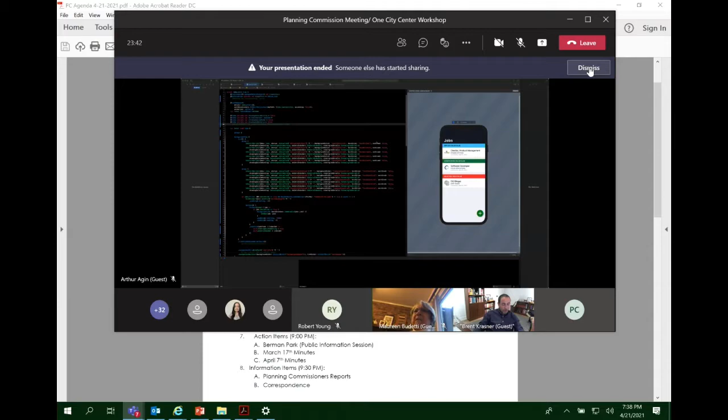So with that, we've adopted the agenda as it's printed, which means before I jump ahead, we have no speaker series. Are there any petitions that we've received, Ms. Bazemore, for items not on the agenda?

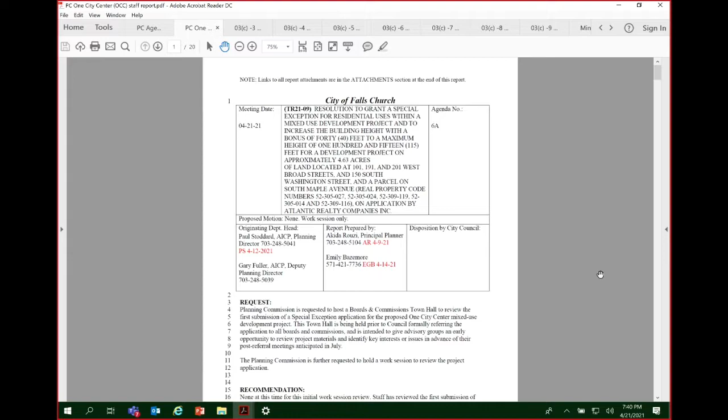All right, thank you, Chair Krasner. If I could just touch on some of those points that Brent already mentioned, the process we're going through here is a pilot effort. We happen to have 2 applications in right now for special exceptions, so we're piloting this new process with both applications. Of course, at the last Planning Commission meeting, there was a workshop on the Founders Row 2 application. And Ms. Bazemore, if you could jump back to the agenda real quick.

We got some feedback from the council this Monday about some concerns about making sure we were messaging appropriately where this application was in the process. So we added this disclaimer to the agenda earlier today, just to highlight the fact that this is, as the chair said, a preliminary workshop. This project hasn't received a formal action from council, and so the idea is to solicit preliminary feedback, early feedback from the boards and commissions. I think the benefit is to get the boards and commissions involved sooner, so that their feedback can be heard and incorporated when the project is in its early phases. And hopefully that's a benefit for the applicant as well, to hear from a wider band of the community what would be interesting to the various participants that take a look at this.

This is a special exception application, and I'm actually going to turn it over for the details of the application and the project summary and the staff analysis to date to the lead case planner on this, Ms. Akida Rouzi. Akida?

Good evening. Before I turn it over to the applicant's team for their presentation, I'd like to provide a brief summary of the staff report. The application before you is for a new mixed-use development proposal at the intersection of West Broad Street and South Maple Avenue. The overall proposed development site entails 5 parcels, including 150 South Washington Street, 101, 191, and 201 West Broad Street, and a small vacant parcel at the corner of South Maple Avenue and West Broad Street.

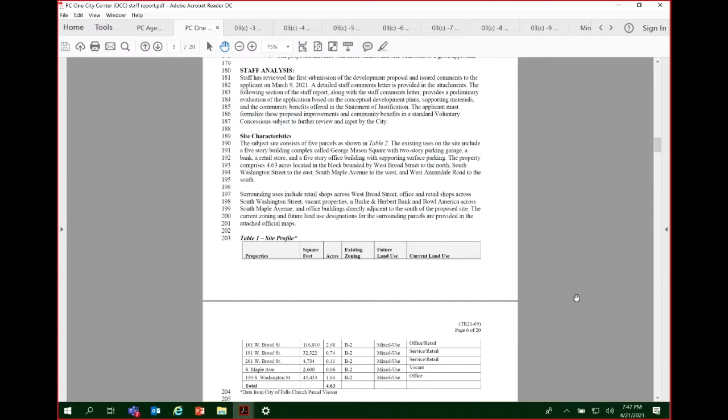And the proposed community benefits—the applicant plans to provide their first draft, as mentioned, as part of their second submission in mid-May. Right now, most of the proposed community benefits are discussed in their narrative statement and their SC view book, and staff's evaluation of those, based on the SC code, is provided on page 8 of the staff report. For tonight, I'll just provide some key highlights from that analysis.

For comprehensive plan consistency, this area is already planned mixed-use on the comp plan land use map, so the proposed development is consistent with that vision. The comp plan also calls for a balanced mix of uses that reinforces and maximizes pedestrian connectivity and results in a significant market-driven commercial activity center, supported by residential uses necessary to ensure commercial success here.

For small area plan consistency, the downtown small area plan recognizes the project site as an area for dense redevelopment potential. The site is within the core commercial area, which is envisioned for greater concentrations of commercial activity that supports density and taller building heights.

Like the comp plan, the small area plan also talks about investment in pedestrian infrastructure, walkability, and active and vibrant streets. With the ground floor commercial uses proposed in the project and the pedestrian improvements around the site, the project begins to demonstrate consistency with some of these goals for the area. Of course, the investment in existing commercial spaces like the George Mason Square building and the 150 South Washington building is another positive aspect of the project.

So I think we all know where the site is located. This is something that we've all walked by. We've dined at 4Ps, we've walked strollers by, we've jogged by. It's really 5 separate parcels of record, as Ms. Rouzi said, comprising about 4.62 acres. On the site today, there's about 130,000 square feet of existing commercial uses.

This includes the existing parking garage that is attached to George Mason Square, the 3 office building complex, shown in number 4. It also includes 150 South Washington Street, the office building just on the south side, shown in parcel number 5. What's interesting about that is it's split, bisected by Annandale Road, which was pushed through when the city extended Annandale back in the late 1960s.

So it separated that parcel out. And in the southeastern quadrant of that intersection, directly opposite the bowling alley, is a triangular parking lot. Sometimes it's used for overflow parking, but it is paved from stem to stern, and it's just sort of sitting there. Up at the corner of Maple Avenue and West Broad Street, directly across from the CVS parking lot,

there's the very small parcel number 1, what we call the corner parcel, and number 2, which is the Matt's Tailoring parcel. Those are the 2 properties that were conveyed to the city or from the city to Atlantic Realty, and they're the ones that have the residential deed restriction on them. It basically says that thou shalt not do any residential on those 2 parcels without the blessing of the city in writing.

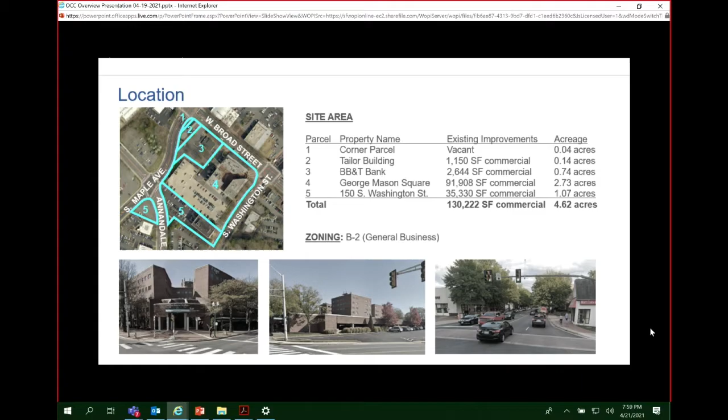And then last but not least is the BB&T, the former BB&T building and its associated parking lot as well. All of these properties are zoned to the B2 General Business District. And again, the total amount of commercial square footage is about 130,222 square feet. So if we can go to the next slide, please.

Ms. Rouzi touched on the comprehensive planning recommendations for this site. We really view this as a positive step in the implementation of the city's comprehensive planning policies, which, at least in terms of this site, go back more than 15 years.

The future land use map, shown on the left, designates this property for mixed use, which encourages innovative residential, retail, and commercial office uses. The 2005 comprehensive plan incorporates the city center concept plan, along with a new mid-block pedestrian crossing along West Broad Street and a traffic circle at the intersection of South Maple Avenue and Annandale Road, catty-corner to the redeveloped bowling alley. That concept plan, shown in the upper right-hand corner, was incorporated into the 2005 comprehensive plan.

Shown in the lower right-hand corner is an excerpt from the 2014 Downtown Small Area Plan. The Downtown Small Area Plan includes this property within what is known as the core commercial area of Downtown Falls Church, and it is intended to evolve into the densest, most walkable and bicycle-friendly district in the city for downtown. So if we can go to the next slide.

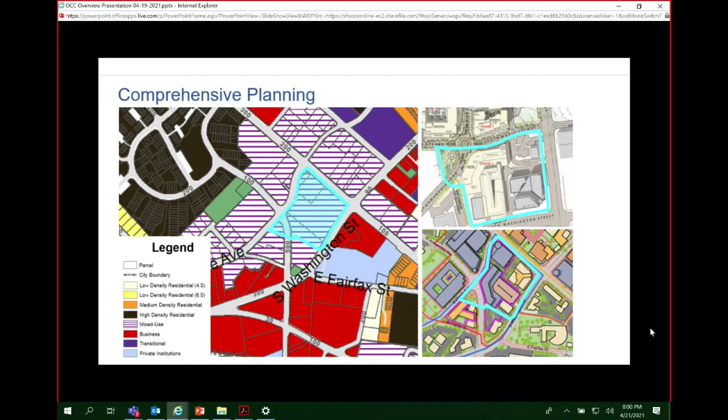In addition to these specific city council requests, there would be at least two planning commission requests. One would be a site plan for the new construction, the new mixed-use building and the new things that we're proposing on the site. And then one would be a site plan amendment to show the changes that we're proposing to the existing George Mason Square office complex. So we will hopefully be back before you for both of those at a later time before the commission, after or concurrent with this process.

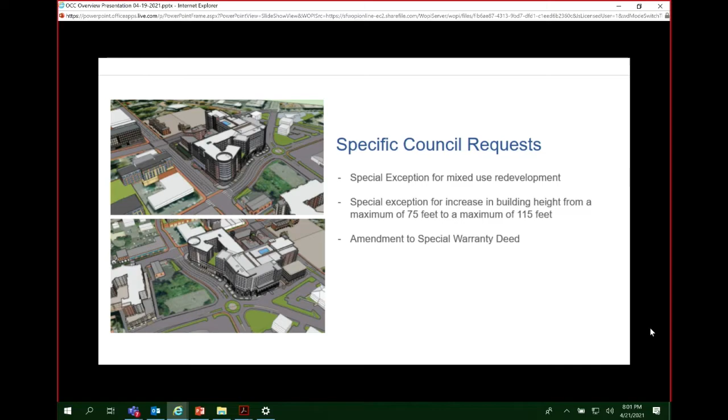If we can go to the next slide, please. We want to take a step back and just talk about how we approached the design that we'll be showing you this evening.

This is a site that is extremely prominent in the city. So we have tried to view the site holistically and as a key component to Downtown Falls Church. When you come from I-66 and you're heading south towards the Dunkin' Donuts and you're sitting at the light, that site is there. It's visible as soon as you pass the State Theater, right? And you look off to the right.

This is an area that has long been planned to evolve into a vibrant commercial hub, residential hub, mixed use hub. It's a site that has waited for a long time for the right mix of land uses to help realize the downtown small area plan. And we've also been thinking about repositioning George Mason Square to make that asset work better. So that's the first design driver: to view this site holistically.

The second is equally important, and that's really to celebrate the site's visibility and have a strong outward face on all street frontages. This comprises an entire city block in downtown Falls Church. The site is surrounded by streets on all sides, and that means it has a lot of visibility, a lot of opportunity, but it also has a lot of design responsibility. So we have sought to treat it as such, meaning each facade, each public street frontage matters.

We also wanted to capture a concept that we had heard during our discussions, that the city should appear as though it's built up over time. It's not just one massive building with all the same architecture. It looks like it has been organically building up over a period of years, so that you have organically derived but connected buildings from the same architectural typology. The third driver is to enhance pedestrian connectivity in and around the site. The city has a 2017 Streetscape master plan.

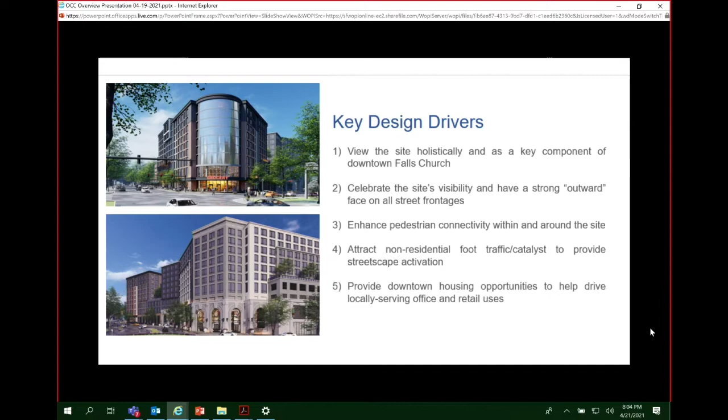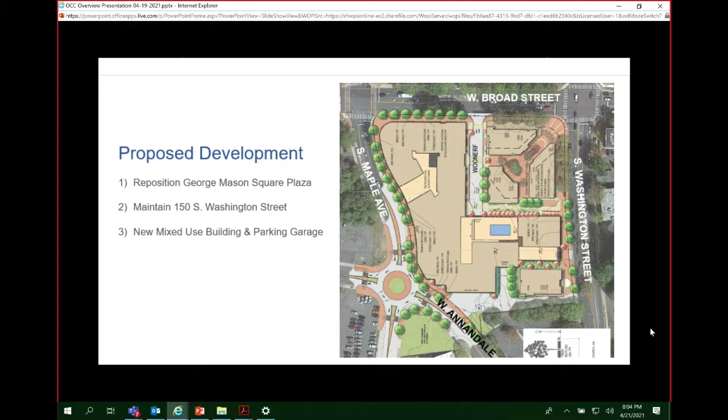So the proposed development, as we've conceived it, really has 3 components. And I think it's better, Ms. Bazemore, if we can go to the next slide. It's probably easier if we look at the color-coded version. Okay, so the first component is shown in red.

As I mentioned before, it's repositioning George Mason Square and the plaza. The second one is to maintain 150 South Washington Street, do some facade enhancements to match the proposed architecture of the new mixed-use building. And the third one, shown in blue, is the new mixed-use building. Interspersed in there are a couple of key open spaces, one of which is what we'll call the Woonerf, which is going to be a shared Dutch-style living street, which will act as an extension of George Mason Square. And then what to do with the open space parking lot that's at the corner of Maple and Annandale, across from the bowling alley. If we can go to the next slide.

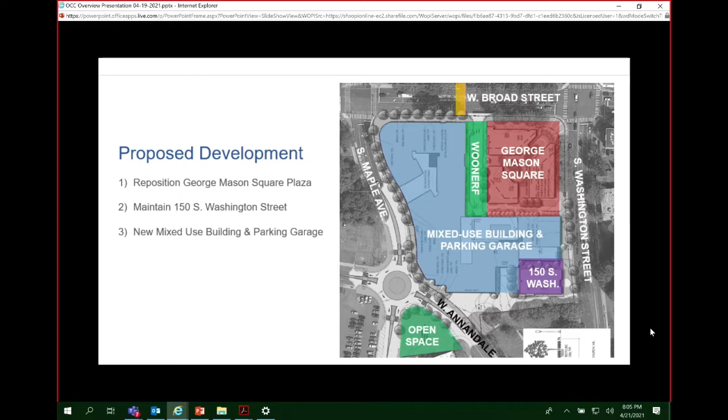So to talk about George Mason Square for a moment, we all know George Mason Square, we've probably all walked through there. Right now, it's a lot of dead space. It was built in 1980, and it looks every bit of it when you walk there. Very underutilized space, and it's not very welcoming or inviting to pedestrians whatsoever. So the concept here is to retain the existing 91,000 square foot 3-building complex, but to do some serious facade enhancements at the ground level, what we all experience.

So this includes removal of that arcade, facade enhancements for the first 2 floors, renovating the ground floor pedestrian plaza with landscaping and hardscaping and seating areas and new lighting and overhead lighting, and adding ground level bump outs for restaurant uses along South Washington Street. If you walk by that section of South Washington Street, the sidewalk is overly large. There's usually newspapers floating about there during periods of high wind. It's certainly a quieter area. And we're kind of thinking it'd be somewhat similar to the bump out that was provided for 4Ps on the West Broad frontage. But we think there's a lot of opportunity there to really liven up that frontage.

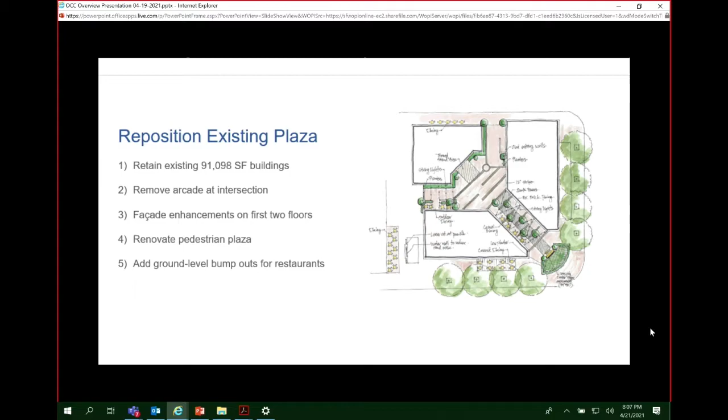And then there's the new mixed-use building. The new mixed-use building would see the demolition of the former BB&T building and the Matt's Tailoring building. Together, those comprise about 37,000 square feet of commercial uses, and tearing down the existing parking garage and replacing it with a new 430,946 square foot mixed-use building.

This new mixed-use building would be LEED Gold certified. The building's architecture will be variegated to provide an organic nature, more pedestrian scale as well. We are also proposing to replace the existing garage with a much more modern, much more efficient parking structure, which is critical to leasing and, frankly, access to the entire downtown.

And as some of you all know, there is an existing agreement between the city and Atlantic Realty to provide parking nights and weekends for visitors. And we are in the process of looking at that agreement and seeing how that all works to be able to provide continued access going forward.

In terms of commercial, 25% of the square footage would be net new commercial in the new mixed-use building. That includes 109,000 square feet of new commercial uses. Of that, about 66,000 square feet would be retail, restaurant, or retail service uses and medical service uses on the first floor of all street frontages.

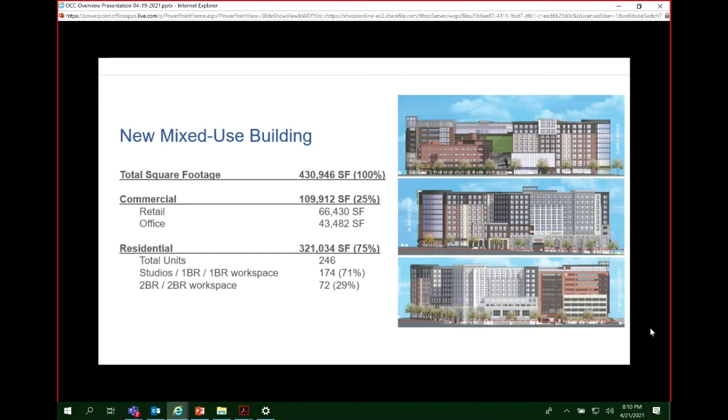And 29% of the units would be 2 bedrooms and 2 bedrooms with dens. There would, of course, be a series of private amenities provided within the proposed mixed-use building for both the residential and office tenants. If we can go to the next slide, please.

I mentioned the living street, if you will, the Woonerf, which is situated between George Mason Square and the proposed new mixed-use building. This would come out directly across the street from Mr. Brown's Park. So if you're sitting at Mr. Brown's Park, just look directly across West Broad Street, and that's where this would sort of daylight.

This is intended, as I said earlier, as a Dutch-style living street that would feature high-quality pavers, overhead accent lighting, landscaping, hardscape treatments, and parallel parking for adjacent retailers as well. But it's really intended to be a spatial extension of the revitalized George Mason Square courtyard.

Because as I mentioned before, when you go into George Mason Square, it just sort of ends. It doesn't take you anywhere, and there's nowhere to continue on. So what this is proposed to be is an extension of that. We're proposing to line the Woonerf with retail so that you can go through George Mason Square and it becomes the center of this larger retail-activated area.

The Woonerf would be programmed to be able to be closed off periodically for special events and fairs. We're also proposing, at the end of it in the upper left-hand corner, to draw people in and activate the street frontage, a 30 by 40 exterior visual screen, an LED screen, which could be used for on-the-green events when this is closed off, coverage of live city events and performances like Watch Night or the Memorial Day Parade or concerts or something like that.

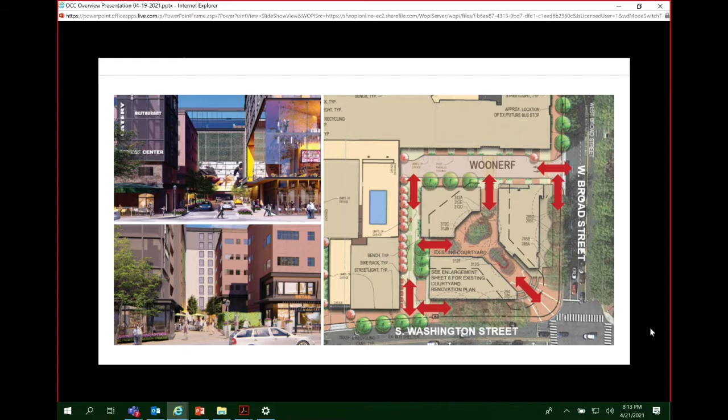This is a slide that shows some of the transportation aspects of it, and I want to mention a couple of things about it. First, in terms of landscaping, we have a series of trees and plants and flower beds.

We'll have opportunities for biofiltration and the maintenance of biodiversity. At the lower end of the picture, you can see that triangular park. We are proposing to upgrade that park, turning it from impervious area to a pervious park, open space for this area of the city.

I think it's extremely important because if you go back to the city center concept that was previously approved, or think about the future that could occur in this back of house area, eventually there will be dense development here. It might be 20 years down the line, but at some point we're going to need some green lungs for this section of downtown. There needs to be a complementary park, just like Mr. Brown's Park, on this section of town.

The other thing I'll mention is that the city is currently in a study right now to look at upgrading the intersection of Maple and Annandale Road. It's an intersection that can be difficult to traverse, and they are looking at both a standard four-legged mast arm intersection, and also a traffic circle.

The traffic circle concept, the rotary concept, goes back to the 2005 comprehensive plan. We are in favor of the traffic circle. We've conveyed that, and we've been comparing notes and sharing our engineering with the city's engineers.

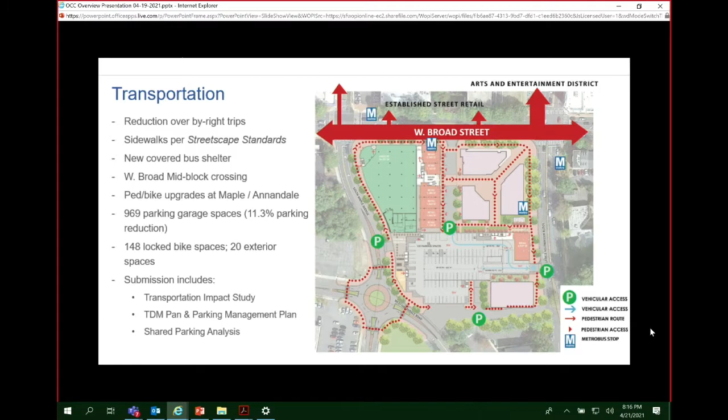At this point in time, I'd like to turn it over to Thomas Dinny, our architect with DCS Design, to walk you through the architecture, some of the pretty pictures, and the floor plates, and then he'll turn it back over to me. So, Thomas, are you on the line?

I sure am, thank you. Good evening, my name is Thomas Dinny. I'm the Vice President with Davis Carter Scott, and I've been working on this project with the team for quite some time.

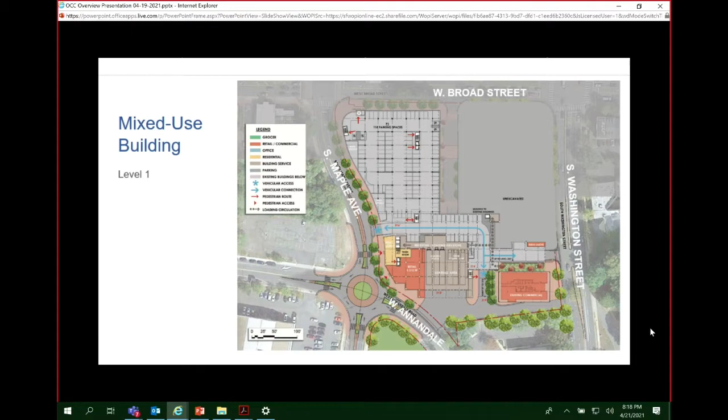The site is not a complete flat site. It slopes from West Broad Street down to West Annandale. This image shows what's on grade at the corner of West Annandale and Maple Avenue, where we will have some retail, the residential lobby main entrance, and an entrance to the garage from South Maple Avenue.

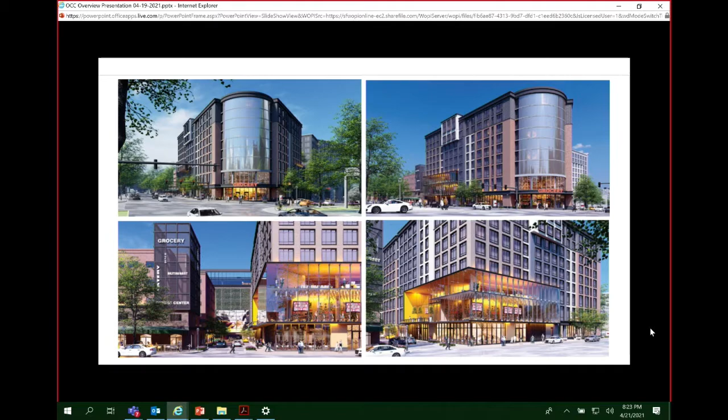As we continue down the road, we can see the buildings, how they change shape, and you can see the residential above it. Our intent is, as we said, a number of different buildings that we have built throughout. You can see the base entrances to the garages. We have in this corner a little bit more of a classical style.

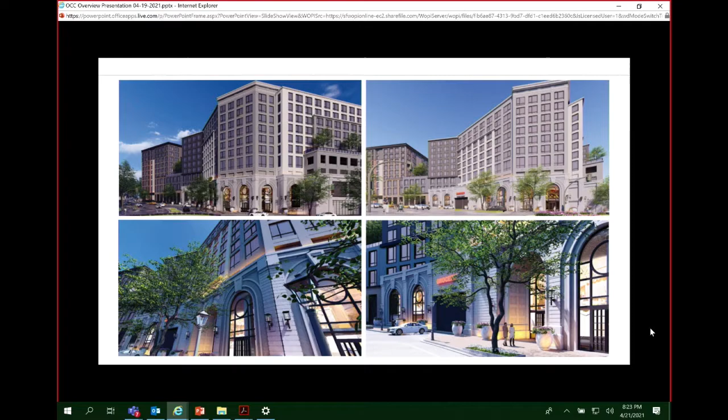All right, Andrew, I think that this is... Yeah, if we could go, Ms. Bazemore, if we could go back a few slides to slide 15, I believe, which are the earlier renderings. Thomas, just wanted to show you, if you could walk through the views of George Mason Square. That's okay. Right, there we go. Thank you.

Can we go back, please? Thank you. If you look at the slide in between the two office buildings...

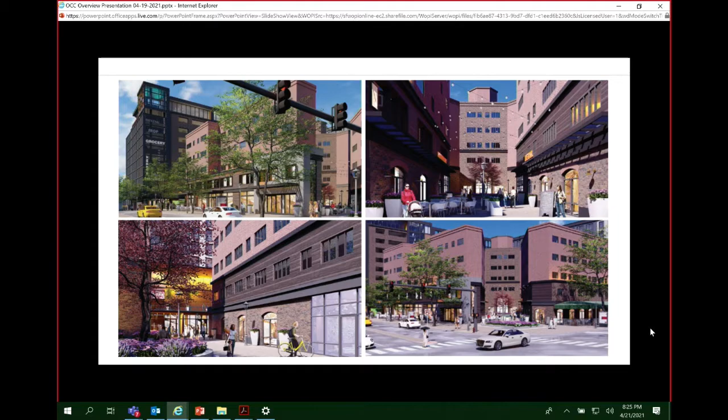And Ms. Bazemore, if we can now, thank you very much, Thomas. If we can go back to the slide, and I'm sorry that these were out of order. That was my fault.

One more. Just to touch on these real quick, a couple of the issues that were raised that we've heard from City Council, and we don't have answers to them tonight. These are things I just wanted to let you know what the issues are that have been raised.

What is the commitment to housing affordability? We all saw what Insight Properties did with Broad and Washington, the fiscal impact. And I want to say this as well as the anchor commitment: we do not want to overpromise specific tenants just to get the project approved, only to have the tenant in this volatile retail market walk, and then we're all scratching our heads as to say, how did we get duped?

As Thomas had said, we are programming about 26,000 square feet at the intersection of South Maple and West Broad Street, across from the CVS, for a single use tenant. We've indicated that would be grocery stores, which would be great. Those discussions are ongoing with a potential tenant, but we don't want to have this project or the fiscal impact, from a predictability perspective of the city's treasurer, be dependent on something that we can't deliver.

So the numbers in Ms. Witzman's fiscal impact analysis are not predicated upon having any anchor. They're predicated upon the base worst case scenario. Now, clearly, there's every incentive to have that be used for a single tenant. It's concrete construction, for example. It's high bay, two levels. So it lends itself naturally to wanting a single user, and we're going to make every attempt to get there through this process. But I wanted everyone to know that from an anchor perspective and a fiscal impact perspective, we're not counting on that. I think we're trying to be as transparent and wise as possible on that.

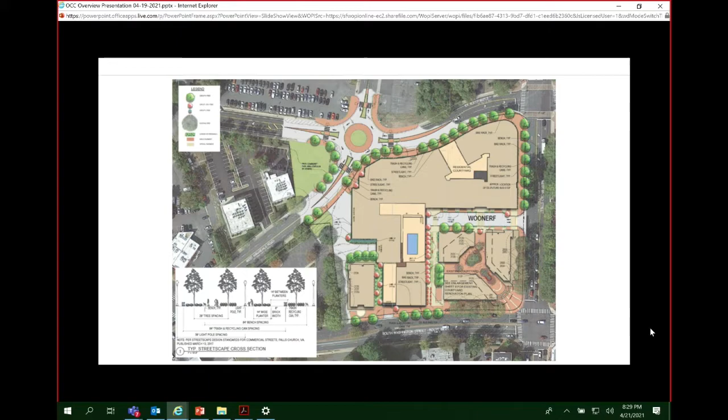At this point, for the final part of this presentation, I'd like to recognize Pete Crawford from Urban Engineering to talk about stormwater. There are just a couple of slides. If we could skip the next slide and go straight to the last two, we can skip over this one I think. Okay, Peter, are you on the line?

I am, and I know you said it's the final part, but it's the most exciting part as well. My name's Pete Crawford, I'm with Urban Engineering, the civil engineers for the project. What this slide shows, and what I wanted to explain to the group, is that the existing site is currently fully developed, and a majority of the existing site is impervious today.

With the proposed redevelopment, we are anticipating a decrease in impervious area, which is a great positive benefit to the environment. We're doing that by converting the existing parking lot on the southern side into open space, as well as adding streetscape planters and various vegetated areas around the site.

The number one goal for our stormwater strategy is really to protect the downstream water resources of the city, and ultimately the greater Chesapeake Bay watershed, from pollution and flooding from stormwater events. The site will be graded to adequately drain runoff into storm inlets or stormwater planters throughout the site. After the water is collected, it's routed downstream, where before it leaves the site it'll be treated for water quality.

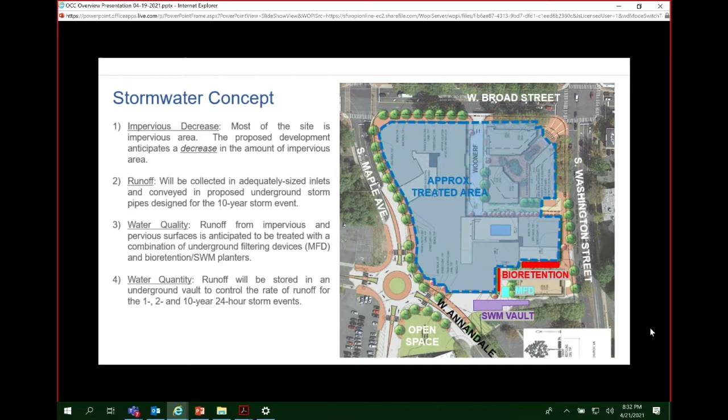There's then a particular media within the soil that's specifically designed for the water to infiltrate through, treat the water, and then it leaves the bottom of the facility through an under drain system and gets routed downstream to the stormwater management vault. So that, in a nutshell, is the stormwater management concept. Really the goal is to treat the water before it leaves the site for both quality and quantity, with the overall goal of protecting the water resources of the city.

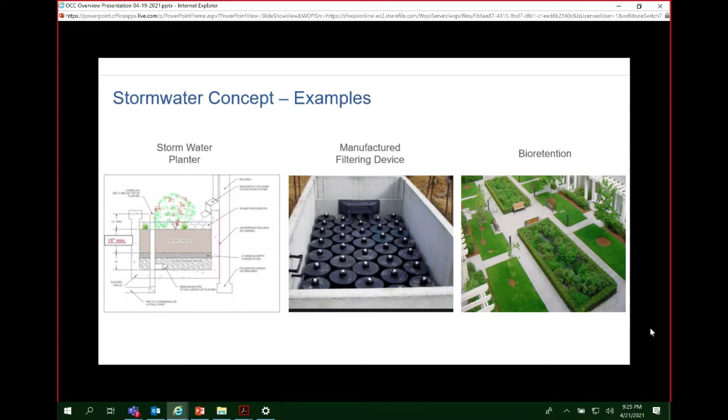Thank you. All right, well, moving right along. We're just a little bit behind, about 25 minutes at least, on Mr. Stoddard's time estimates. I wonder how he comes up with those estimates, but we're just a little bit behind. So we'll keep right on trucking here.

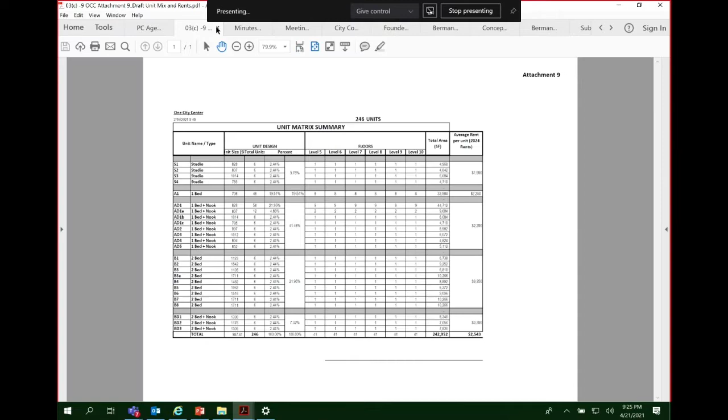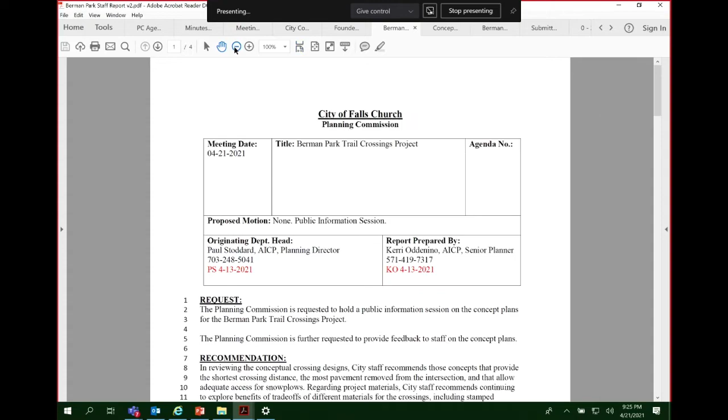Now we're going to move to action items. The first action item is the public information session for the Berman Park trail crossings project. So with that, Paul and Ms. Oddenino, I will hand it over to you.

Sure, thank you, Mr. Chair. What I'd like to do is just go ahead and introduce the item briefly, describe what we're doing, the goal for tonight's session, and then turn it over to the lead planner, Ms. Oddenino. So tonight this is billed as a public information session for another CIP project happening within the city. This is something we've been doing more of with recent projects, the idea of taking conceptual level designs for projects to the Planning Commission. As we've talked about a number of times, your authorities under the charter give you pretty broad sway to weigh in and make recommendations on urban design.

You all also have a role in forming the city's CIP and making funding recommendations to the council. So that's the premise tonight: show you the early concept designs, collect any feedback you have at this early stage, and then try to incorporate those as project development continues. I'm going to leave the rest of the storyline and project description to the lead planner. I'll turn it over to Ms. Oddenino. Kerri?

Thank you, Paul, and good evening, and thank you to members of the Planning Commission and others here tonight. So there's a staff report and there's also a presentation. I may just jump to the presentation since there's a lot of the same material covered. Again, my name is Kerri Oddenino, and I'm a senior planner at the city, and the project manager for the Berman Park Trail Crossings project. Vince Yee from Toole Design Group is also here tonight from the consulting team. He did most of the work putting together the concepts and is available to help answer questions about the project.

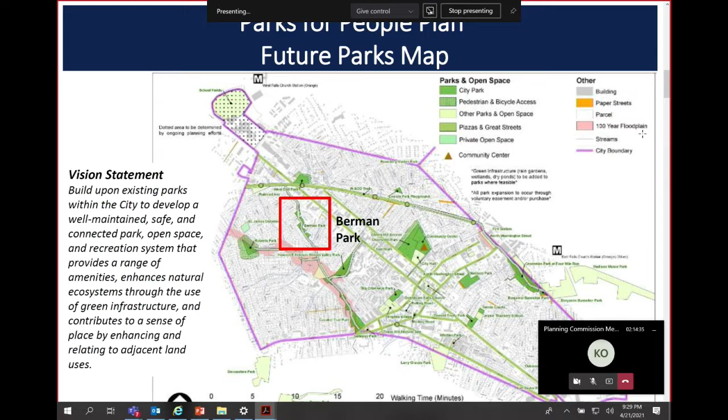In terms of scope, the project will update four street crossings, including Ellison Street, Kent Street, Irving Street, and South Spring Street. The project charter and grant application called for the crossings to be enhanced with special paving materials to highlight the trail crossings, and a narrowed street cross section to shorten the pedestrian crossing distance. The grant application also called for raised crossings. In combination, these features will create a safer pedestrian experience by decreasing crossing distances, increasing driver awareness of pedestrian activity, increasing visibility for all users, and decreasing vehicle speeds.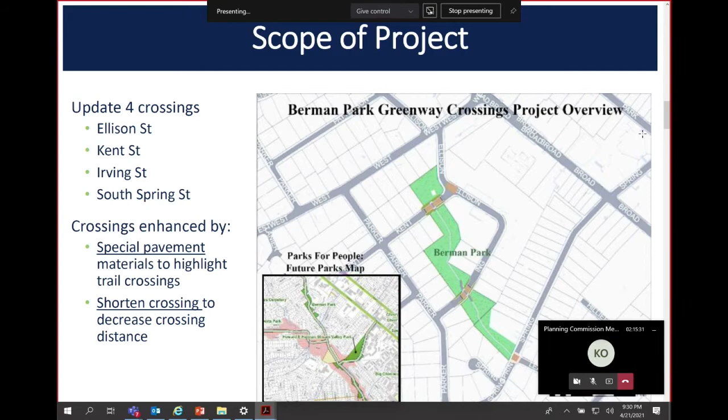Looking at the Kent-Ellison intersection, for option 1, proposed changes to the Kent-Ellison Street trail crossings include curb extensions and a marked crossing at the mid-block trail crossing at Kent Street. Changes also include a new sidewalk that runs inside the existing curb line along Kent Street, connecting trail users to a new stop-controlled intersection at Kent-Ellison Street. The proposed intersection includes a reduced curb radius on the southwest corner, a floating curb extension on the north side of the crossing with parking restrictions in and adjacent to the intersection, and a curb extension with a new curb ramp on the southeast corner.

For option 2, proposed changes include curb extensions and a marked crossing at the mid-block trail crossing at Kent Street. Changes also include a new sidewalk to connect trail users to the new stop-controlled intersection at Kent-Ellison. Option 2 also proposes a realignment of Kent Street to intersect with Ellison Street at a perpendicular angle to improve sightlines and reduce pedestrian crossing distances. The proposed sidewalk along Kent Street follows the curb of the realigned Kent Street, and the proposed intersection includes a reduced curb radius on the southwest corner, floating curb extension on the north side of the crossing with parking restrictions in and adjacent to the intersection, and a curb extension with a new curb ramp on the southeast corner. This option reduces the asphalt paving at the intersection substantially. City staff is recommending option 2 for Kent-Ellison due to more pavement removed from the intersection and the crossings being shorter in length and more perpendicular.

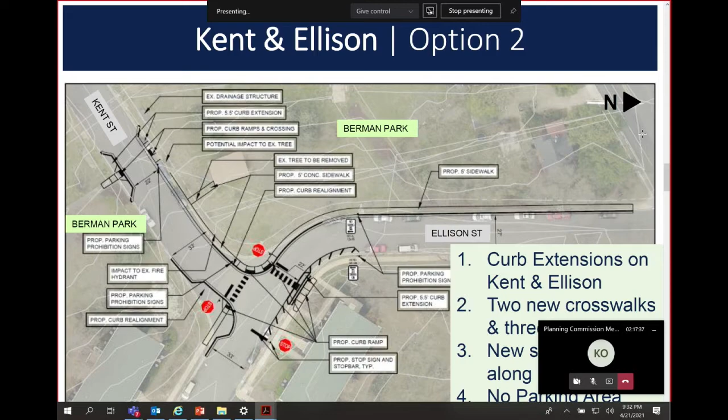For Irving Street, option 1 proposes curb extensions on both sides of the street to narrow the gutter-to-gutter width to 22 feet. Parking restriction signs and markings are proposed along the north side of the crossing to ensure the required sight distance.

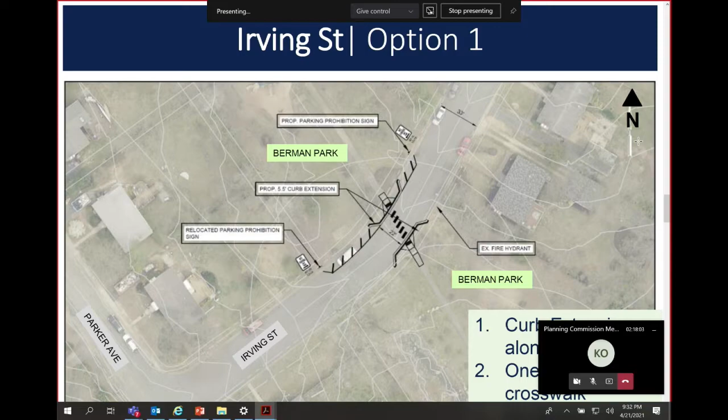For option 2, the proposed design includes a floating curb extension on the north side of Irving Street and a marked center island to narrow the travel lanes to 11 feet. Parking restriction signs and markings are proposed on both sides of the crossing to ensure the required sight distance. Of the two options, city staff is recommending option 1, since the second option overly relies on pavement markings, does not shorten the crossing distance, and leads to the loss of additional on-street parking.

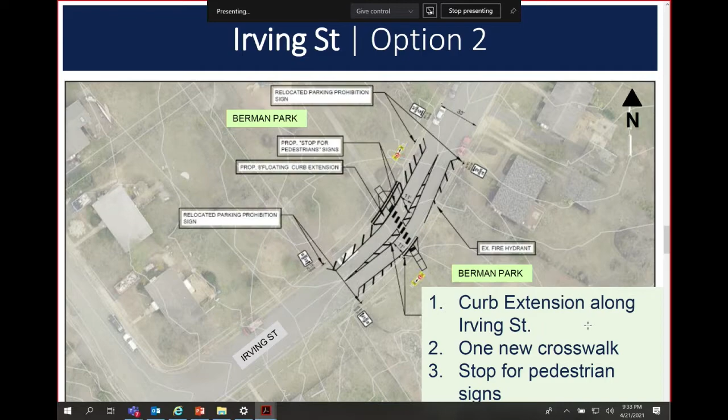For South Spring Street, option 1 proposes changes to the Lea Court and South Spring Street intersection, including replacing the existing diagonal crossing with a perpendicular crossing and adding a 6-foot refuge island on the north side of the intersection to narrow the travel lanes to 10.5 feet. Both corner radii are reduced to 15 feet, and a curb extension on the north side of Lea Court tightens the gutter-to-gutter width of the street to 22 feet and provides the space required for a new curb ramp. New parking restriction signs are proposed to ensure the proper sight distance.

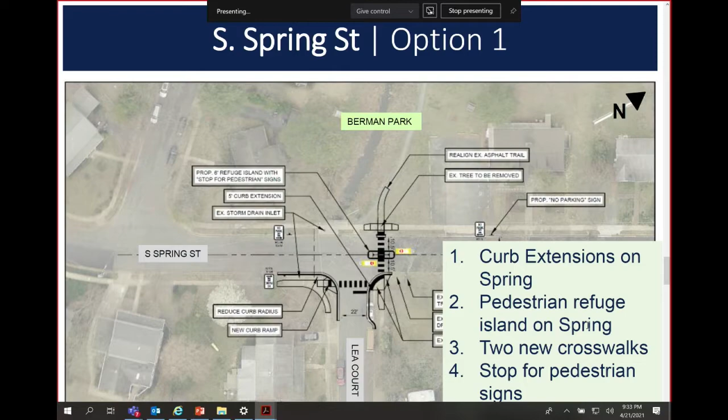For option 2, proposed changes are the same as option 1, except there's no center median, and there's a curb extension to reduce the gutter-to-gutter width to 22 feet at the crossing.

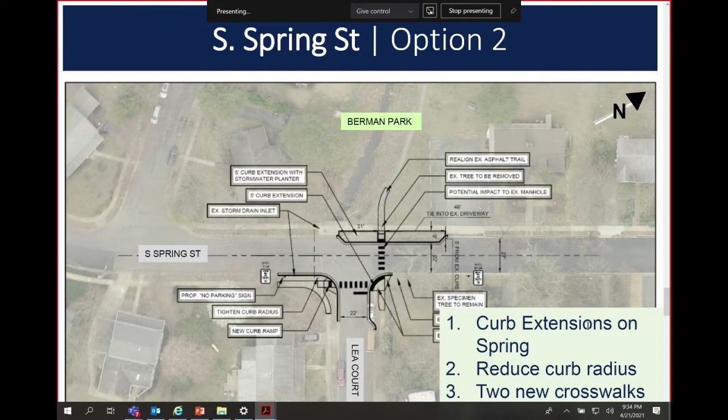So for option 3, proposed changes to the trail crossing include shifting the crossing to the south side of the intersection and reducing the curb radii on the southeast corner. The proposed crossing is not perpendicular to vehicular travel due to existing drain inlet locations, but is less diagonal than the existing crossing. A 6-foot wide center refuge island helps slow down traffic along South Spring Street.

So of the 3 options for Spring Street, option 2 is the city staff recommended option. The medians shown in options 1 and 3 create challenges for snowplows.

In terms of overall comments regarding design of the crossings, so that they feel more like a linear park, ornamental plantings around the crossing locations could help create more of a park-like feel.

Marked crossings could be replaced with stamped concrete or asphalt, or raised crossings, so that the painted crosswalks are less costly from a budgetary perspective. But other options are something that could be looked at as we move into development of the 30% plans. So these are actually pre-30% plans and concepts at this point.

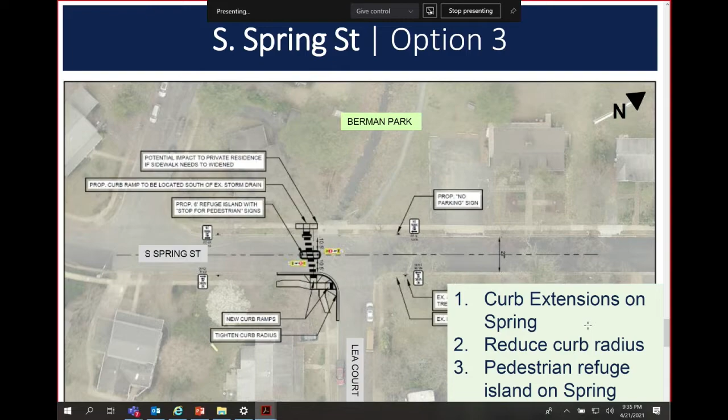In terms of project timeline, a grant application was first submitted for this project in fall 2017. Preliminary engineering is slated to be completed in January 2022. The project is expected to go to construction in January 2023 and be completed by July 2023.

Okay, thanks, Ms. Odini. Now, Tim's first out of the gate. Go ahead, Mr. Stevens. Okay, thank you. I'll provide some feedback here as well. This looks to me like it's a very good project.

There's certainly an equity component given the location of the fields nearby. I think it's going to make this park more accessible and certainly safer. So I agree with the options on the 3 crossings listed here for the reasons you give.

Refuge islands, it doesn't seem to me that that really is a good idea, not only for the snowplow reasons, but also it just seems to imply that it's okay for cars to still drive by if a pedestrian is on an island. So I'd rather see the etiquette being, hey, if there's a pedestrian anywhere close, you stop and let the pedestrian go.

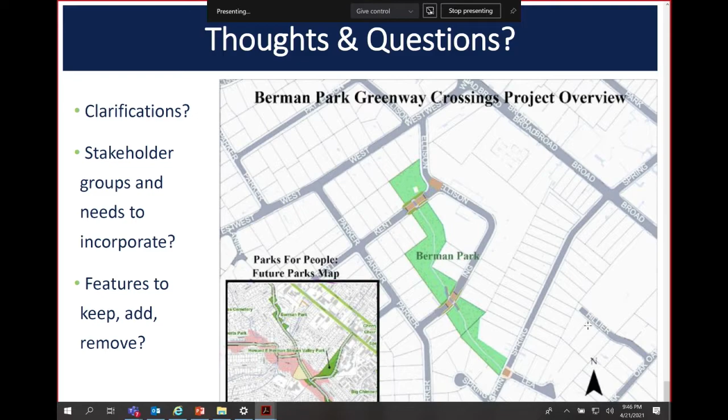Okay, if there's no other comments from folks. Now, technically, this was just a public information session, Paul. There's no formal action we need to take, right? This is just feedback. Obviously the feedback is welcome. Ms. Bazemore, did we receive any public comment on this one? We did not. We did have it listed as an action item. Mr. Chair, on the last couple of these information sessions, the Planning Commission has selected someone to pen comments, if you all want to do that. But staff has heard your feedback tonight, and we're happy to incorporate it, whether there's a formal letter or not.

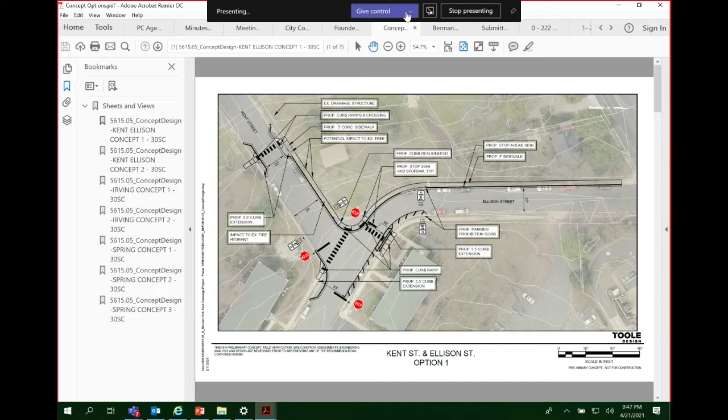I think we'll let our verbal comments today serve as our comments. With that, we'll move right along given the time here, and move on to the next items, which should be quick.

Approval of minutes, March 17th and April 7th. I guess we'll have to consider each one separately, so we'll start with March 17th. Were there any comments, revisions, edits from anybody to the March 17th minutes? I am not hearing or seeing any hands go up.

I spoke too soon. Mr. Stevens? Yeah, just going to say move to adopt. Motion. Do we get a second? Second by Mr. Puentes. Discussion? Roll call vote. Ms. Bazemore, please. Mr. Krasner? Yes. Mr. Stevens? Yes. Ms. Teates? Yes. Mr. Puentes? Yes. Ms. Weiss? Yes. Ms. Coleman? Yes.

Thank you, everybody. The next one, April 7th, 2021. Doesn't seem so long ago. Same thing. Mr. Stevens, you're...

Yeah, I do have a substantive comment on this one. At line 75, it says that NGBS could be utilized here. That should be NGBS should not be utilized. I will fix that. Thank you.

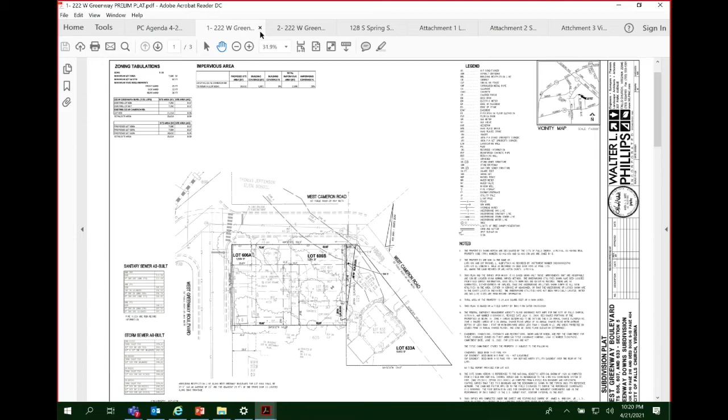We'll get to our last item, the work session for the special use permit. This is a work session on a recommendation to the Board of Zoning Appeals for a daycare use at 128 South Spring. We were just talking about the Scout House, very timely, because here we are talking about the Scout House.

I will say, I never knew the history of that building. The website for the Scout House has a pretty good little history, going all the way back to the original owners, hundreds of years ago of the land. It was pretty interesting. So anyhow, that's my introduction.

But Paul, the application has some issues, I think. Why don't you give us an overview, and we'll briefly discuss it here.

Sure, let me briefly introduce the item before I turn it over to the case planner. This is a work session for the Planning Commission tonight, and as you said, the applicant has applied for what's called a special use permit to run a daycare facility on a property with an R1A zone.

Special use permits aren't all that common in the City of Falls Church. They are a provision of the city's zoning ordinance that allows for uses that would generally be consistent with the by-right uses. In R1A, usually that's single family housing. So the special use permit allows for uses that are generally consistent, but provides a mechanism to review any impacts those uses might have on surrounding or neighboring properties.

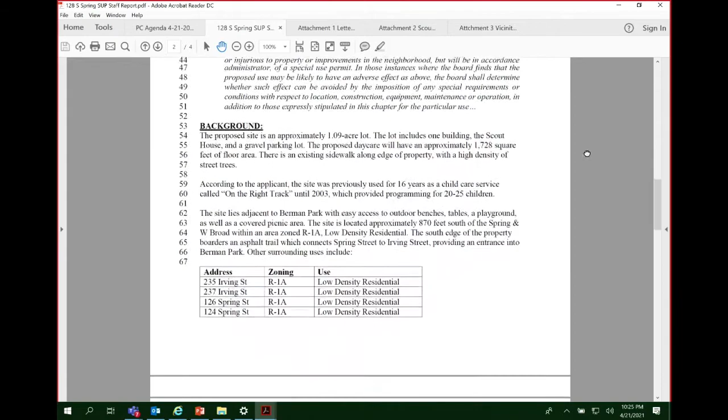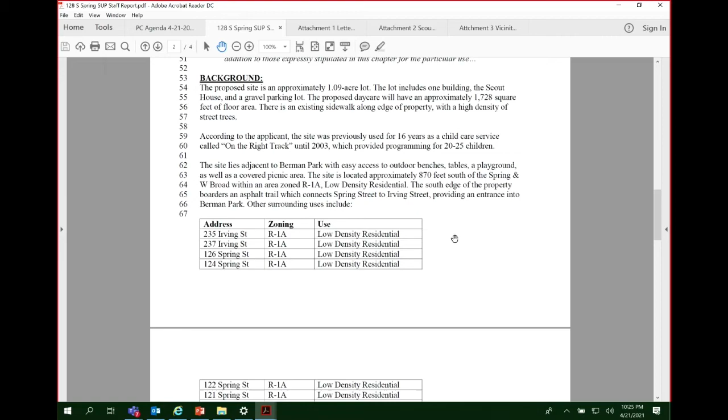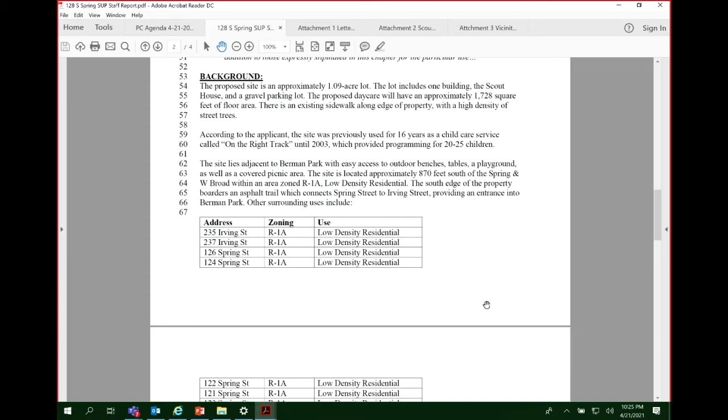Going to some background, the lot is about 1 acre, includes 1 building, the Scout House, and a gravel parking lot. According to the applicant, the previous use was 16 years as a childcare service called On the Right Track, until 2003, which provided programming for 20 to 25 children. The site is adjacent to Berman Park, with easy access to outdoor benches, tables, playgrounds, picnic areas. It is within an R1A low-density residential area surrounded by houses. The south edge of the property borders an asphalt trail which connects South Spring to Irving Street, providing entrance into Berman Park. There's also an 11-minute walk from Thomas Jefferson Elementary.

Going to staff analysis, according to code, the proposed daycare is a conditional use permitted by a special use permit in the R1A low-density residential district. Based on a staff evaluation of the site and adjacent uses, and with regard to considerations for approval of the special use permit, staff finds the proposed use would be a proper use for the property.

Staff is seeking additional information from the applicant regarding the transportation parking plan for teachers, as well as pickup drop-off for students. There are 12 existing unmarked parking spaces in the gravel lot, as well as 2 handicap spaces for parents and staff members. According to code, daycare and kindergartens must provide 1 parking space per 125 square feet of area plus 2 for employees. This would have a total of 16 parking spaces required for the site.

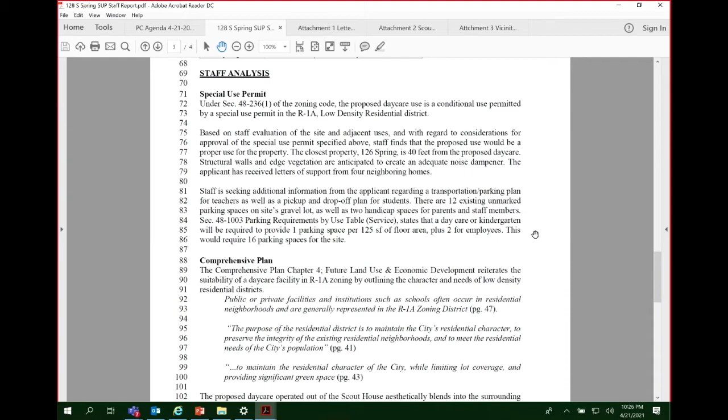The comprehensive plan goes into further justification for the proposal. Chapter 4, future land use and economic development, reiterates the suitability of a daycare facility within R1A zoning by outlining the character and needs of low density residential districts. In summary, the proposed daycare operated out of the Scout House aesthetically blends into the surrounding low density neighborhood. In addition to preservation of character, the daycare will serve to fulfill a need by providing additional childcare options for families while providing excellent green space and connection to nearby Berman Park.

There have been 4 letters of support from surrounding neighbors regarding the proposed plan. In regards to timing, this would be going to recommendation for Plan Commission May 5th, and then May 13th would be a BZA action. I'd be happy to answer any questions you have. Applicant Ms. Wills is also on the call.